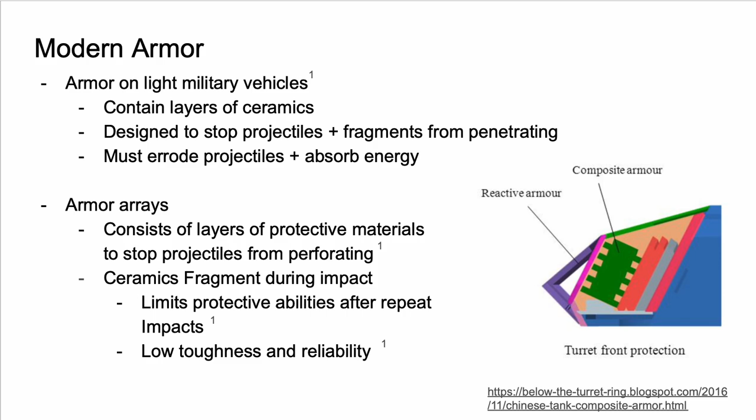Armor on light military vehicles usually contains layers of ceramics designed to stop projectiles and fragments from penetrating. They must erode the projectile and absorb energy. Specifically, armor arrays containing ceramics consist of layers of protective materials to stop projectiles from perforating, while ceramics fragment during impact, which limits the effective protective abilities after repeat impacts, resulting in low toughness and reliability. On the image to the right, you can see various layers of different materials, potentially ceramics, in an array.

Now, ceramics are mainly ideal due to their weight efficiency, and ceramic arrays are far more weight efficient versus steel or similar malleable metals and alloys. Ceramics in arrays usually contain a layer of ceramic itself to damage the projectile, reduce its velocity, and deform it, reducing the penetrator's ability to damage the intended target, while a backing layer secures the ceramic tile and finally stops the projectile.

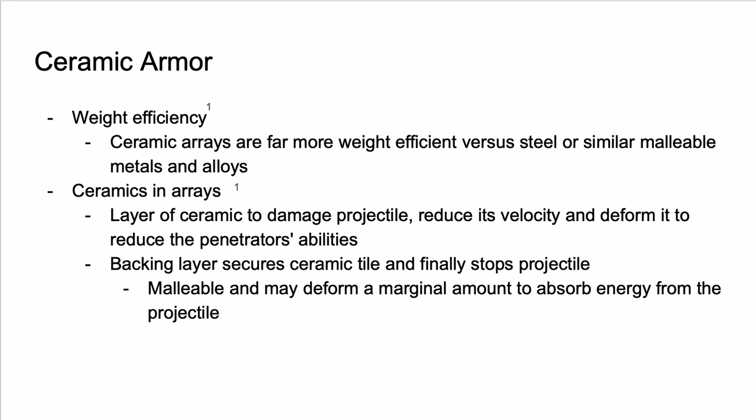It must be malleable and may deform a marginal amount to absorb energy and fragments from the projectile. Now, ceramics have high hardness. This is the resistance of a material to permanent deformation and allows the plate to absorb more energy. This also results in low fracture toughness and shattering in the area local to impact.

On the image to the right, you can see a projectile and fragments leaving the rear face of a plate due to the high hardness of the material, resulting in a high transfer of energy from the projectile into the plate.

Now, when compared to steel, ceramics usually have a density of around 3.85 grams per cubic centimeter, while steel's density is about 7.85 grams per cubic centimeter, and steel is much denser than ceramics. Also, when compared in the ability to transfer energy, ceramics have a modulus of 370, while steel's is 210, where a higher number is a stiffer material, basically meaning that ceramics will absorb more energy from a projectile.

Finally, ceramics fragment, shattering into smaller shards.

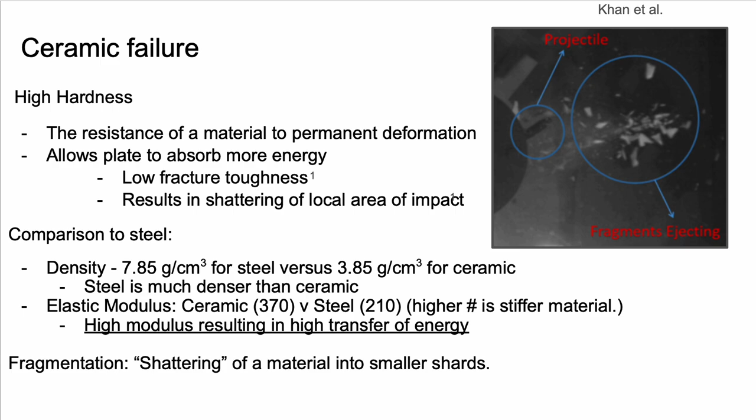Now, the impact velocity is the velocity at which a projectile impacts the target. Ballistic limit is the minimum velocity where a specific projectile may perforate a specific target, and the V50 is the velocity where a projectile penetrates the target half the time. The other half the time, projectiles fail to fully penetrate. They lodge in the target, fragment, or ricochet.

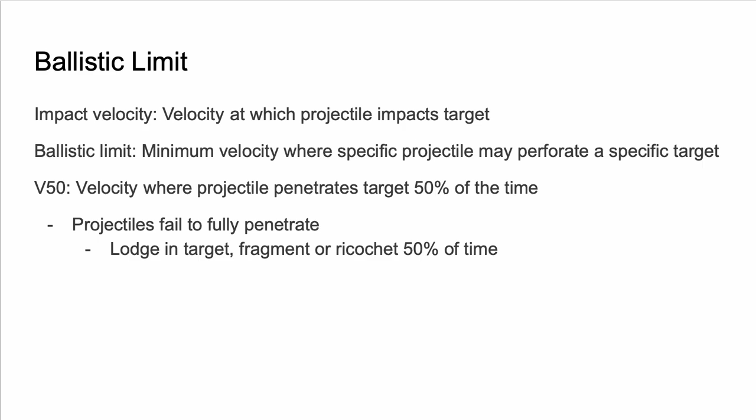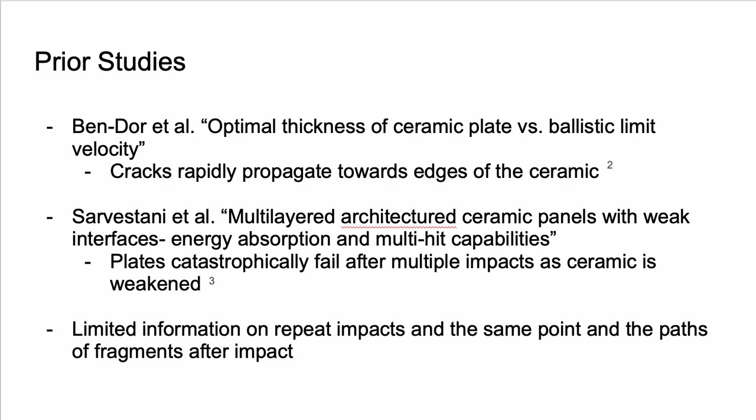In Ben-Dor et al.'s study, cracks rapidly propagate towards edges of the ceramic, and in Sarvestani et al.'s study, plates catastrophically fail after multiple impacts as the ceramic is weakened. This means there's limited information on repeat impacts at the same point and the paths of fragments after impact.

The problem is that around the V50 ballistic limit of a plate to a given projectile, the plate will fail half of the time. When the plate doesn't fail, the penetrator is stopped and the plate is substantially weakened. On the right, you can see what a projectile might look like lodged in a plate after a non-penetration. You can see that layers of the composite in this case have split apart and have weakened the plate because of this.

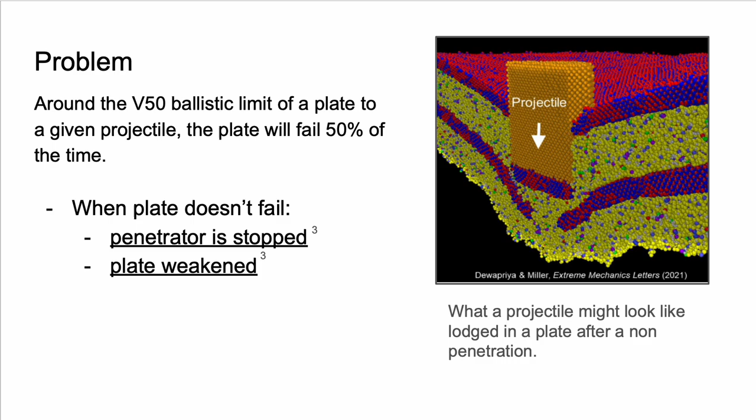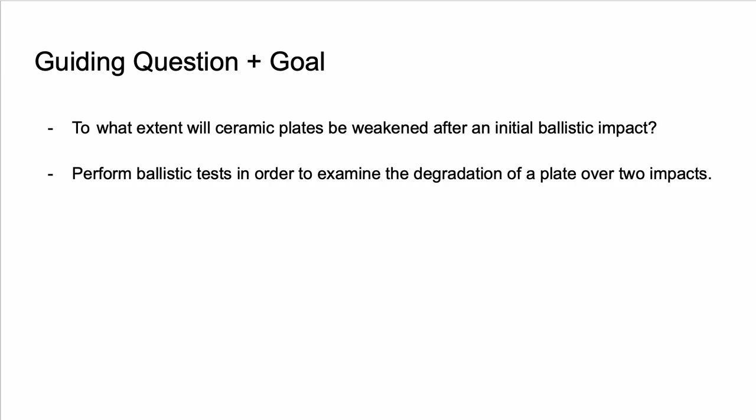So our guiding question will be: to what extent will ceramic plates be weakened after an initial ballistic impact? The goal will be to perform ballistic tests in order to examine the degradation of a plate over two impacts.

So first we'll build a launcher to use as a testing device. Both the launcher and mount will be constructed by myself, and I will construct a single frame for the entire apparatus.

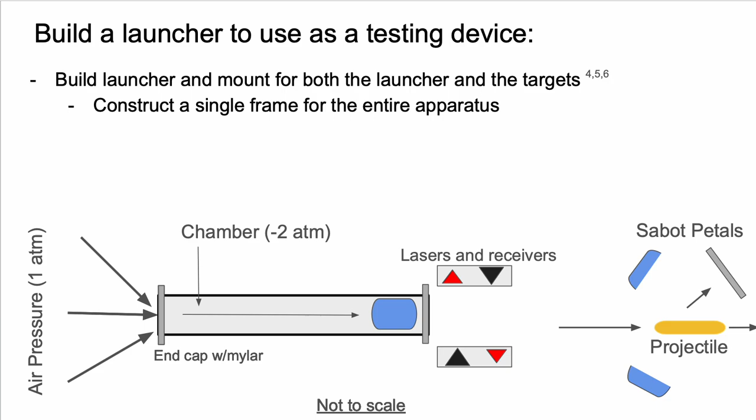Now on the diagram below, you can see the lasers and receivers for a light gate. The projectile will block each pair of laser and receiver beams, and this will allow us to find the distance traveled over a certain amount of time, allowing us to find the velocity of the projectile.

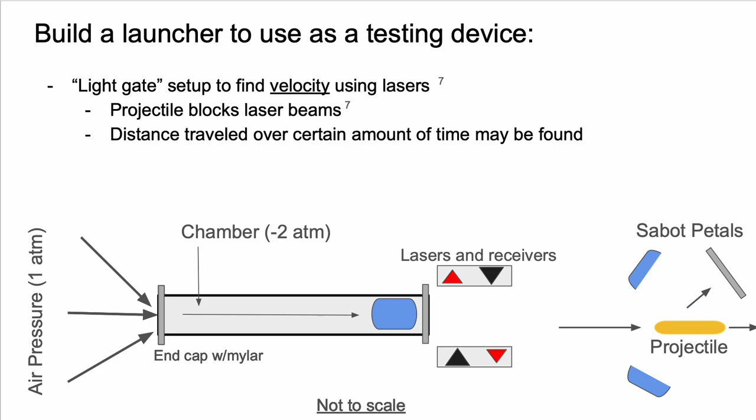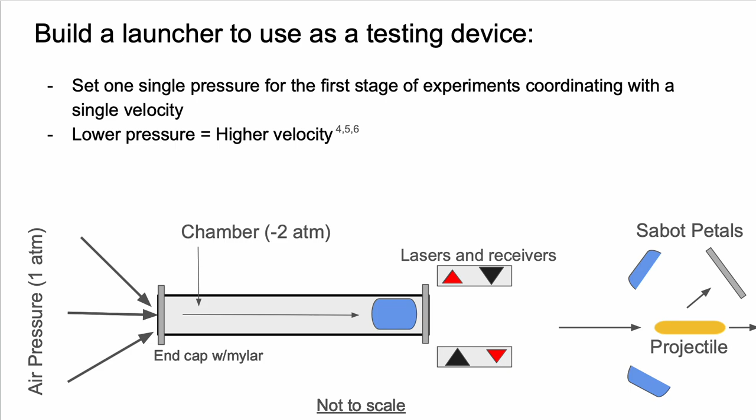Now, for the initial set of tests, one single pressure for the first stage of the experiments coordinating with a single velocity will be set, allowing us to have a benchmark velocity for the projectile. A lower pressure will result in a higher velocity, as the projectile will be contained in a chamber at about -2 atmospheres, meaning that when the rear end cap is perforated, the air will rush into the chamber, forcing the projectile forward, past the light gate, and eventually into the intended target. This diagram is not to scale, but it's a good way to show the actual process of the launcher.

The intended projectile to be used in this experiment is a 50 caliber, 12.7 millimeter Browning machine gun projectile, or BMG. It's a steel projectile, and it will be encased in a 40 millimeter discarding sabot mounted in the launcher. The sabot suspends the projectile in the barrel and allows for a higher transfer of energy for a smaller round. The sabot in this case will be composed of resin.

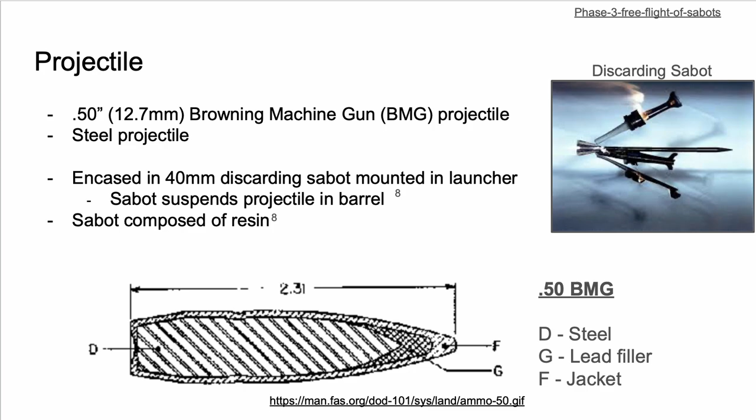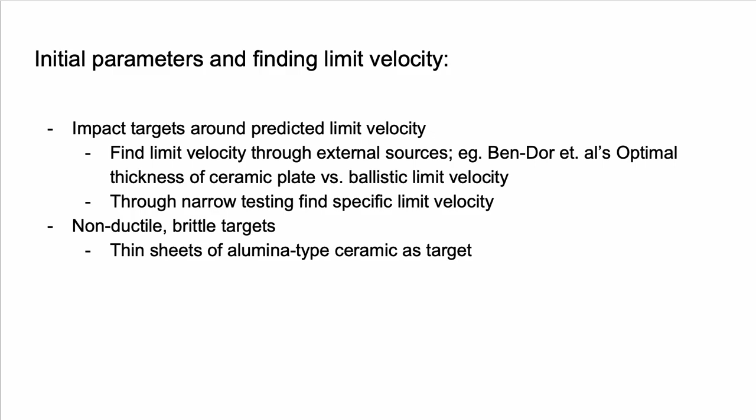Initially, we will impact targets around the predicted limit velocity according to external sources. For narrow testing beyond that, we'll find the specific V50 of the plates. Since they're non-ductile, brittle targets and thin sheets of alumina, fragmentation will be mainly recorded in these later studies.

We'll also record fragment velocity, especially spall, fragments coming up from the face of the plate, and scabbing, fragments ejected behind the plate but not by the projectile, and finally fragments of the projectile itself.

We'll also look qualitatively at the mass and shape of fragments, and take fragment samples. We'll also erect a paper sheet behind the target to see the practical effect on a rough simulation of a person.

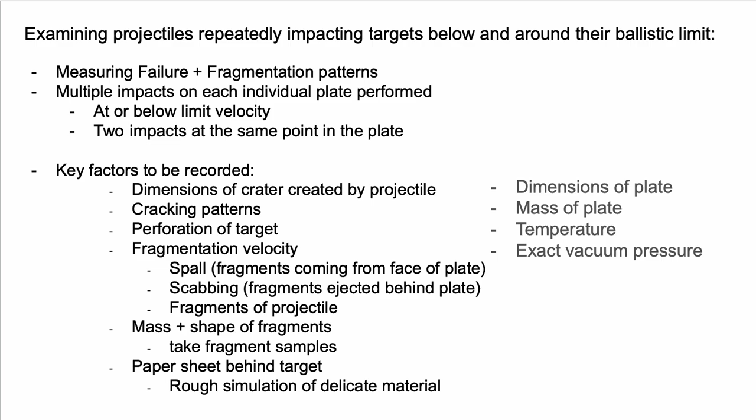And we'll also take the dimensions of each individual target plate, the mass of the plate, the temperature at the time of both the plate and of the surroundings, and finally the exact vacuum pressure before each launch.

Now, during the initial impact, we'll expect large cracks, moderate penetration, moderate spall, and mild scabbing, meaning that the projectile will not fully perforate the plate, only lodging itself in the plate.

During the secondary impact, the plate will fully fail, as the projectile will go all the way through the plate, fully perforating it, and fragments from the rear will have high velocity, and the paper will obviously be very damaged.

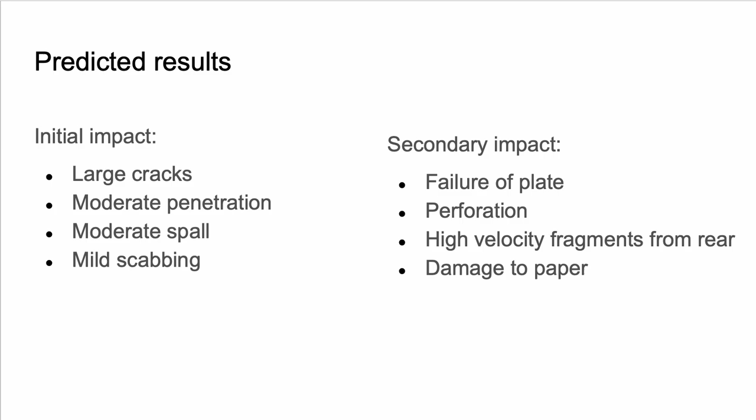Now, this background will allow for future experimentation to find the precise effect of an initial projectile on weakening an armor plate for a secondary projectile.

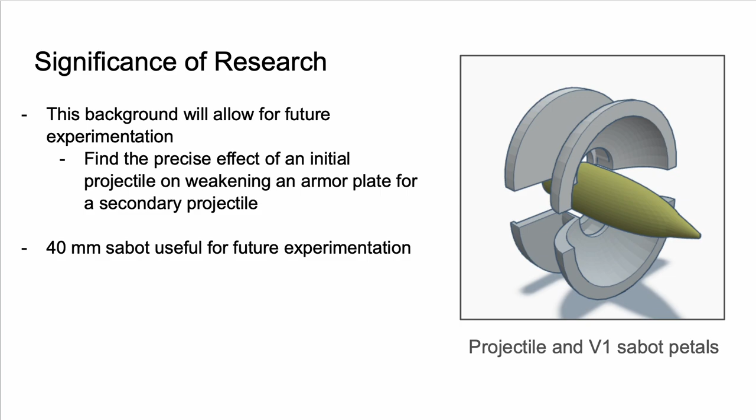Now, in terms of expected limitations, the initial experiment only examines one specific circumstance at a specific velocity, and the V50 inherently requires twice the initial testing subjects to complete the second set of impact trials due to the inherent qualities of the V50. Finally, sabot petals may damage the target if they haven't flown away in time.

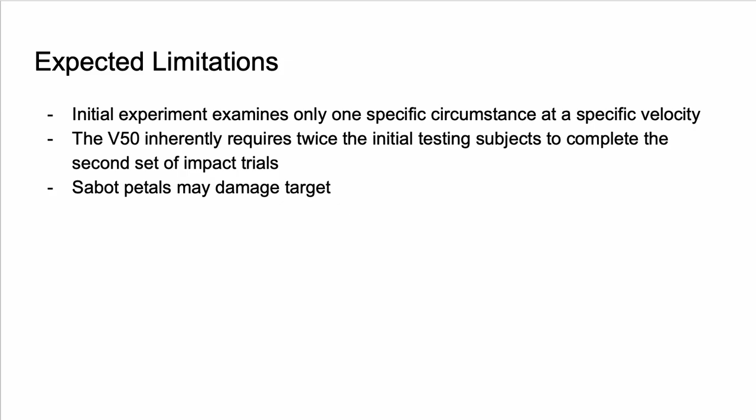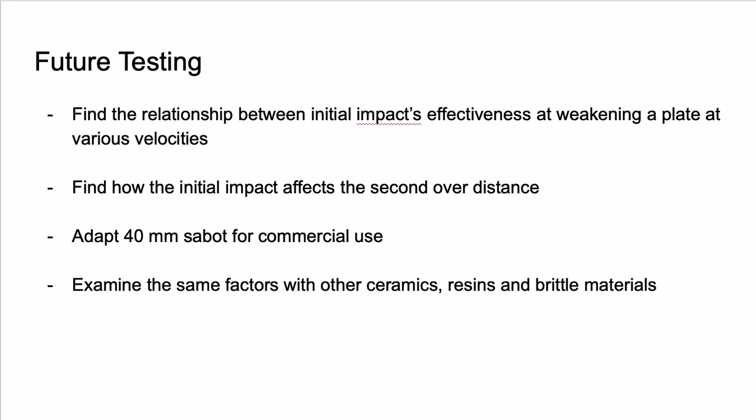Now, in terms of future testing that could be done, we could find the relationship between an initial impact's effectiveness at weakening a plate at various velocities, and also find how the initial impact affects the second over distance. We could also adapt the 40mm sabot for commercial use, or examine the same factors with other ceramics, resins, and brittle materials other than alumina to see different fragmentation patterns from the same set of tests.